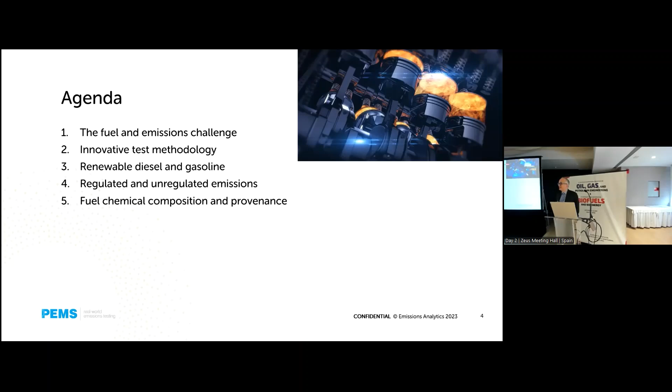Because without wanting to give away the punchline, there are a whole bunch of fuels out there with great sounding eco credentials, but there's also a lot of fraud out there too. And what we don't want to happen is some really promising markets for biofuels to be scuppered because of abuse, arbitrage between the elevated price of alternative fuels and standard fuels. And so that's something we need to be really alert to. And it's not a theoretical problem, as the data will show, it's an actual problem already today.

So what is the environmental issue that we're trying to address? Essentially, renewable fuels exist primarily to reduce the life cycle carbon dioxide emissions. They do have other ancillary benefits as well, but the primary reason we're pursuing it is for greenhouse gas emissions reduction. And so the key question is, how much do they reduce CO2, not in theory, but in practice? The planet doesn't care about theory, it just cares about what actually is emitted. And too many people lose sight of that important distinction.

So the question is, not only does an individual fuel reduce CO2, but can it in aggregate at the system level be a material contributor to decarbonisation? There are lots of things that can do a little bit, but actually if they can't scale to take a big chunk out of the overall problem, then maybe we shouldn't bother too much. But in switching to these fuels, we need to be careful we don't reduce climate change, but reintroduce problems of air quality because it makes tailpipe emissions worse.

So we need to balance those two things and relate them also to the legal values. Because on some emissions, like carbon monoxide emissions, tailpipes now are incredibly well controlled. So we can actually afford a small increase in carbon monoxide and still be massively below the legal limit. So we do need a pragmatism as well.

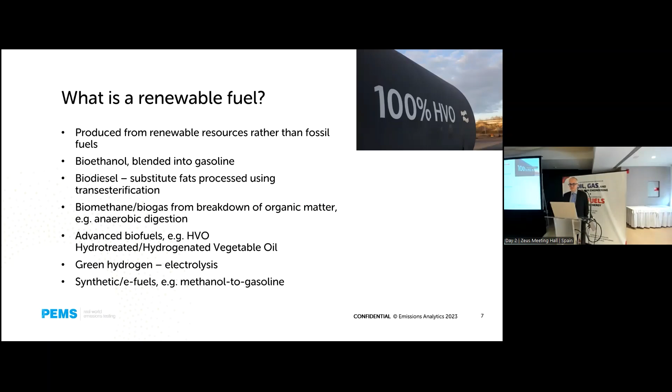The problem with them is the bio components. That all sounds great and lovely, but it changes the combustion characteristics. Could be in a good way, could be in a bad way. What we do know is in most cases the biofuel is lower energy density. So you've got immediately a difference in the efficiency of combustion. So you're burning more volumetrically of the liquid to get the same energy out. And so the bias, if anything, will be towards increased pollutant emissions.

But there are many other substances that are in the fuel, and it leads to an alternative mix of tailpipe pollutants. And you only really know when you try. But that's before you even talk about the upstream part of this, and we need to be really careful that the bio components as sold are really and truly as green as they make out to be, and where they come from, what methods, how far they've been transported even. And verification of that embedded carbon content is difficult.

The other part of the fuel challenge, and not to be neglected, is the scalability and the economics. Because this is really only much help to us if we can do this relatively cheaply and at huge scale. And that's the problem with HVO. There's not enough used cooking oil around to really scale HVO in the way it's currently conceived. Unlike synthetic fuel, which theoretically can be produced at unlimited scale.

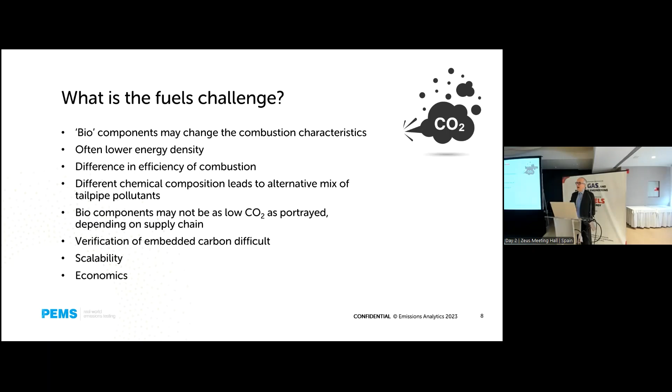And it comes back to our old friend that we were talking about yesterday, the electricity prices, or the low carbon electricity prices, and can we effectively scale that energy backbone of the world? Okay, so we test all these different bits that I talked about, from tailpipe to the fuel itself to the cabin and the tires, and that's the method that we apply.

So think about what we're going to do here. We're going to take a vehicle, we're going to look at the fuel, we're going to chemically analyze what goes into the tank, we're going to burn it, and then we're going to see what comes out of the tailpipe. And I'm going to just take you through a few results of what we've run.

So the backbone of our tailpipe testing is this blue box here, which is called a portable emissions measurement system. It measures CO2, CO, NOx, particles, a whole range of things. It can also do ammonia, at 1 hertz, so real-time mass emission, so actual milligrams per second of the pollutant coming out. You can measure, obviously, the distance traveled by the vehicle, so you can derive mass emissions per kilometer driven. And that's the crucial thing. So it's not just concentrations, it's actually the mass emissions. And this is used in vehicle regulation now in Europe.

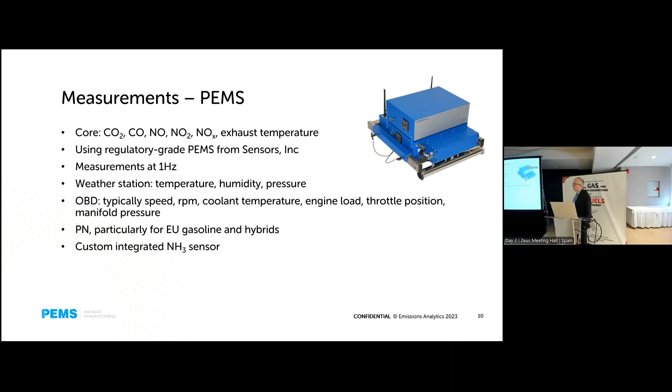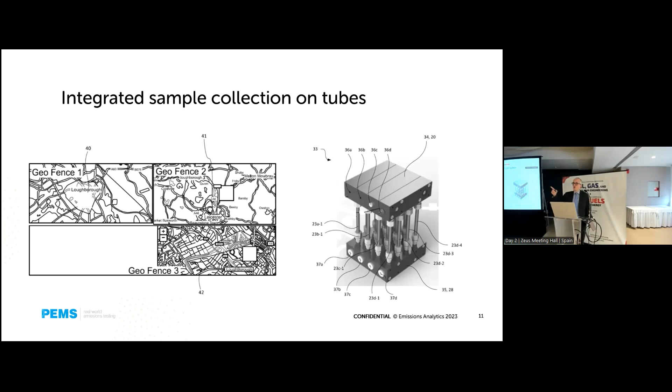So it's equipment of really good standing, but to which we've added an extra piece that we developed ourselves, which enables sampling of the raw exhaust onto various thermal desorption and other tubes, and geofence, so we can put the urban part of the driving on some of the tubes, the motorway bit on another part of the tubes, the cold start bit. And then that enables us at the end of the test to do some very detailed chemical analysis, almost a full VOC speciation, as well as N2O and various other things from that tailpipe.

So you've got the regulated emissions using the blue box, and you've got the unregulated emissions using our matrix of tubes and into this 2-dimensional gas chromatography and time of flight mass spectrometry. So a pretty advanced piece of kit, which allows you to take a sample of exhaust gas and really pretty much fully separate, identify, and quantify, again, in mass emissions terms, what was in that tailpipe.

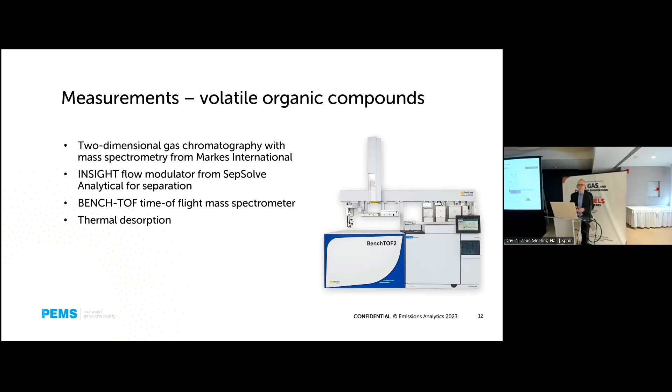So you can see why this is relevant for testing biofuels, that we can see, are we still compliant on the regulated pollutants, but are we introducing any nasty VOCs accidentally? Or are there some additional benefits that we didn't previously know about? The one tricky one that doesn't work using the tubes is formaldehyde, because it's so volatile, but our matrix of tubes does allow for DNPH cartridges, so we can derivatize the formaldehyde and actually measure that as well.

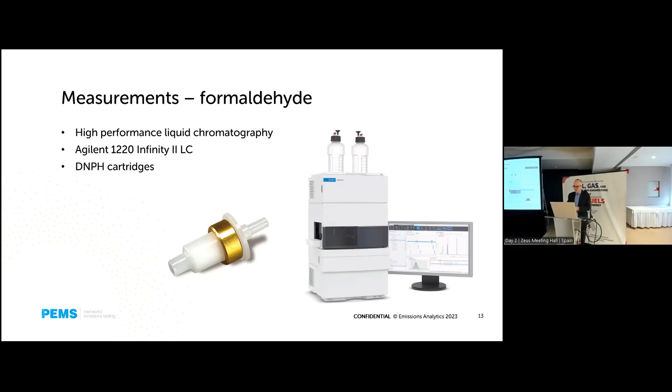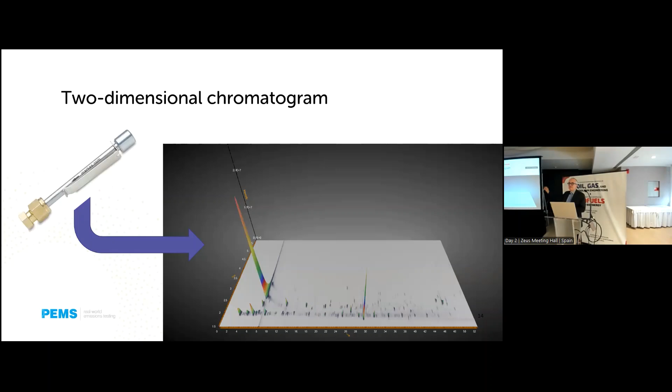Out of the tubes, you then get a lovely 2-dimensional chromatogram with time. The time on the 2 columns is the separator, and this is a real chromatogram. And so you can see from a sample, we can identify hundreds of compounds individually and quantify them. That becomes a bit baffling to get your head round. So we then stick it all back together into various functional groups.

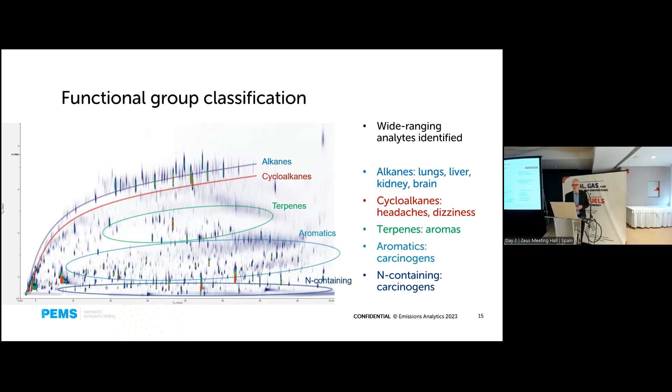Many of you, I'm sure, will be familiar with this. The ones we immediately think about are the aromatics, particularly the polycyclic aromatic hydrocarbons and the nitro aromatics as well, where a lot of the carcinogens lie. But the groups do have their own sort of broad generic effects. Right. So that's how we do it.

So you can imagine a vehicle here instrumented with all this stuff. We can actually then drive it on the real road. So this is not a lab. This is in reality. And so these are real tests we've run. So the first thing was to do a simple test, a tug on the River Thames in London, and the operator there wanted to know, will this be much better for the environment if we switch from running standard diesel to HVO?

What happened? So we got some HVO. The tugboat was pulling 500 tons of payload. This was actually interesting. London was, I think, the first city in the world to do big public sewers, but we did them a long time ago, and they're now too small to cope with the 8 million population of London. So over the last 10 years, London has been building a super sewer along the Thames, which has just opened. It's been fantastic, actually.

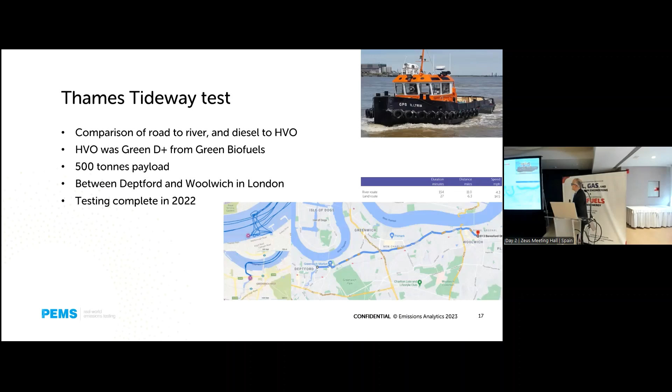And this was about removing all the spoil dug out from this tunnel, because there was a huge amount of stuff. So they wanted to do it in the most environmentally friendly way possible. So as you can see, we went up and down the Thames, moving this spoil. And the ultimate acid test was, is it better to put it on tugboats out on the river, or to put it on lots and lots of different trucks? So that was why we were doing this, and we wanted to choose the fuel that did it in the most environmentally friendly way possible.

So here we've got the result. You see the B7 diesel, that's the standard diesel, the HVO, you've got fuel consumption, but then CO2, all the key regulated emissions. And what we can see here is that essentially it was fantastic. HVO was fantastic for NOx reduction, over a 50% reduction in NOx. And given that's one of the problematic air pollutants in London, that's great.

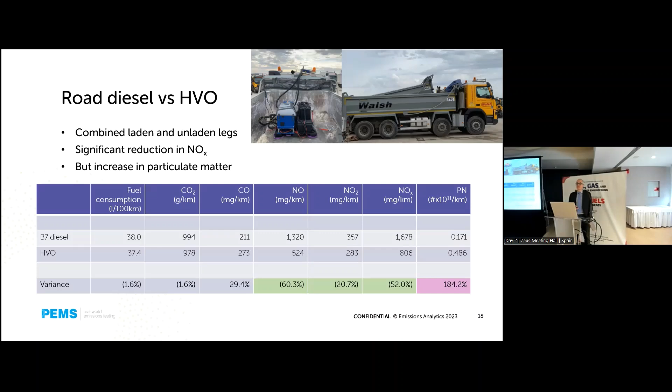But the particle number, which is also a tailpipe regulated value, you can see almost trebled. So it was still actually at quite low levels. So it did treble, but it was still not too problematic. So overall, the view was that HVO was a net contributor on balance to emissions reduction. So that's the sort of simple first case of what we can do.

Now let's look at it in a little bit more detail and look at what happens with some alternative gasoline. So the first thing is I wanted to show how we can use our chemical approach to understanding the different chemical composition. So here we've taken a very simple comparison, just to illustrate what we can do. We've taken a standard diesel and compared it to a premium diesel. Very simple. You can buy these Shell products at the pump today. And this is the power of the 2DGC. Here, we've taken the top compounds that we've identified and ranked them by their concentration in the sample.

The blue line is the standard diesel, and the V-Power premium diesel is the orange line. You can see there's a lot of similarity, but you can immediately identify certain compounds there which are characteristic of the additives they put in and the slightly different feedstocks that Shell uses in putting together the V-Power.

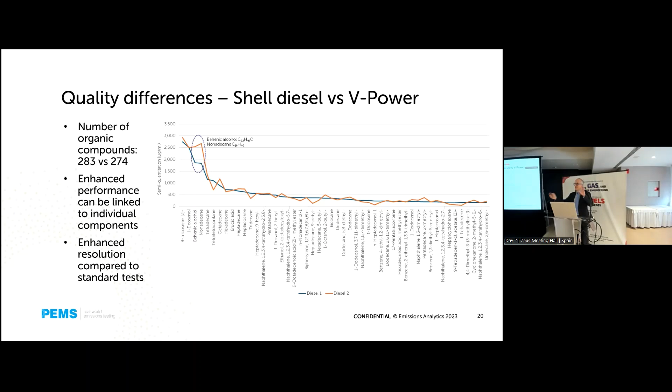So this is the part where we understand what goes in, and then we put it together with what comes out, and we can start seeing statistically the patterns between if you change the fuel, what can happen to the exhaust. We also did the same.

I put this in because we're interested in tires at the moment. People are trying to use pyrolysis of end-of-life tires to create a diesel substitute as well, which is quite an energy-intensive process, so it's not easy to make work. Also, to get the required quality, you see here the green is overlaid on the previous result. Green is the TPO. TPO-based diesel is chemically extremely different from standard diesel, and therefore we would expect it to have really big impacts on the tailpipe emissions. So there's a big debate as to whether that would still be compliant at the tailpipe.

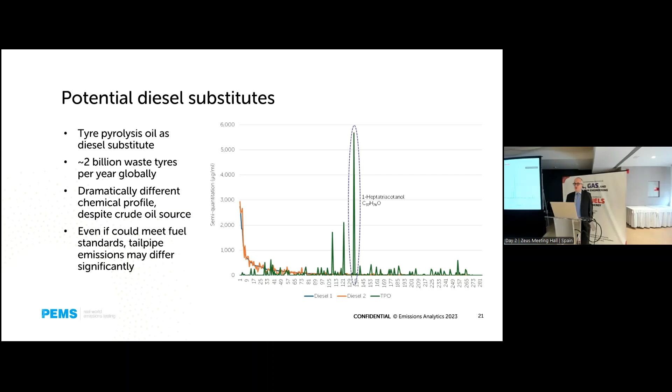Sorry, I slightly preempted myself. We haven't quite got to the gasoline results yet, because I wanted to say one more thing about the diesel side, which is on the HVO. We've looked at the chemical composition and the tailpipe emissions, but what about the provenance side of it? HVO is meant to be lower CO2 because it substitutes fossil for these waste products. But we can use the 2DGC to look at this provenance question.

So we bought 4 different HVOs from the market, legally sold in the European market, all badged HVO, so all notionally the same: HVO 1, 2, 3, 4. We did the 2DGC chemical speciation and compared it to B7 diesel. The null hypothesis is that HVO 1 to 4 are the same. You would have thought there's an ISO standard. It's all regulated. It's all sold by legal companies.

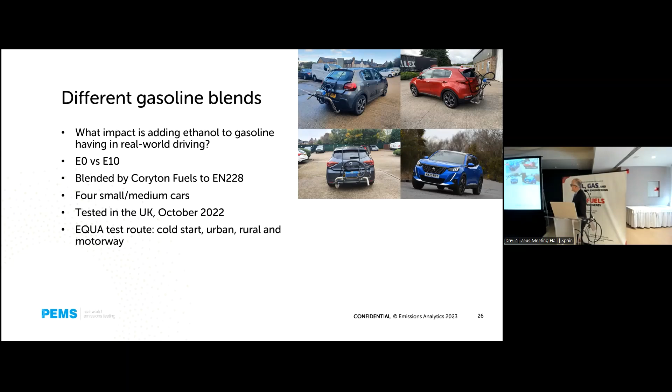So we took four cars that we tested in the UK on our on-road Equa test route, taking in cold start, urban, rural, and motorway, and we looked for regulated and unregulated pollutants. Regulated first: there was a highly consistent result between the vehicles. By switching from E0, no ethanol at all, to E10, there was on average a 31% reduction in carbon monoxide, already from low levels, so very good. But there was a 21% increase in NOx. Fortunately, because it's gasoline, that was a 21% increase from almost nothing to start with.

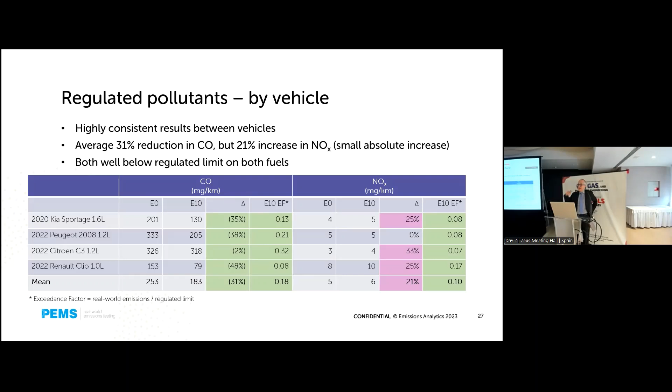So yes, an increase, but the interpretation should be not a problem. Certainly not a significant contributor to air quality. So all well below the regulated limits there. I should say, by the way, E10, you probably know, E10 as sold means not 10% ethanol, but up to 10% ethanol. For the purposes of this test, we got specially blended E10, which was actually 10%. So this wasn't just random.

Unregulated: so we've also had a full speciation of the unregulated, but I'm only going to draw attention to a number of them today. So formaldehyde, other aldehydes, toluene, and nitrous oxide, because they have particular human health effects and other environmental effects. So these are sort of bellwether compounds, if you like. And so these are the results, and I've itemized out here the 4 different cars that we tested. You can see it's a bit of a mixed picture.

On formaldehyde, the overall mean increase was 18%, and the Kia Sportage 1.6 had a particularly big increase in formaldehyde. Other aldehydes were down 20%, but again, a mean of quite a wide spread. Toluene was probably the worst there, with 3 of the 4 showing increases, and the average being a 90% increase. But on the other hand, nitrous oxide was about flat to down in 3 of the cases.

Nitrous oxide, by the way, is a problem primarily as a very potent greenhouse gas. It's about 260 times more potent a greenhouse gas than CO2, I think it is. So small amounts of that are bad.

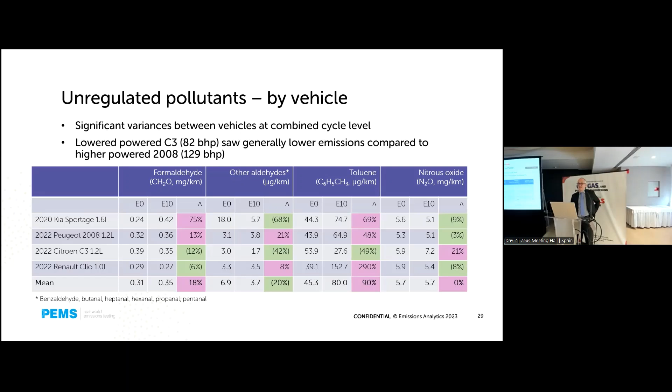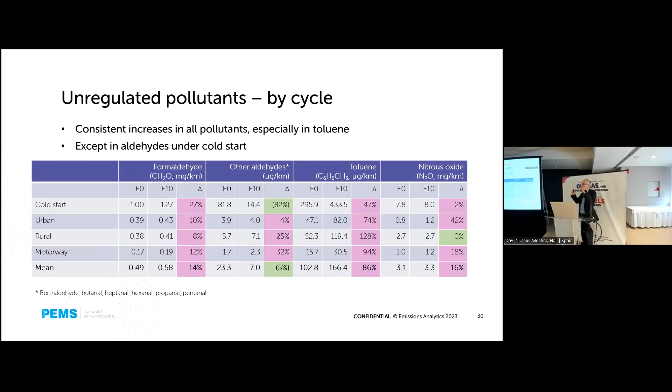And then we can also break down the same results, not by the cars, but by the different parts of the test cycle. So you can see in cold start, actually, the formaldehyde was up the most, but other aldehydes were actually down significantly. Toluene was up consistently, however fast you were driving the car. So that goes to show the power of this test method in terms of the granularity and the real-time data that you can get for both regulated and unregulated.

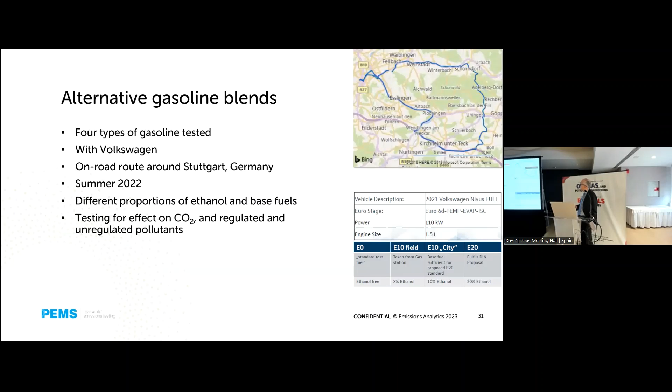We also did a similar test, pushing it a little bit further to E20. We did a test program with Volkswagen on roads around Stuttgart in Germany to see if you can push the proportion of ethanol up even further without having any significant problems. And you'll see here that we begin to see perhaps a limit of what can be done in terms of the proportionate blending. And I'm looking at our US colleagues who push the proportion of ethanol higher than we do currently.

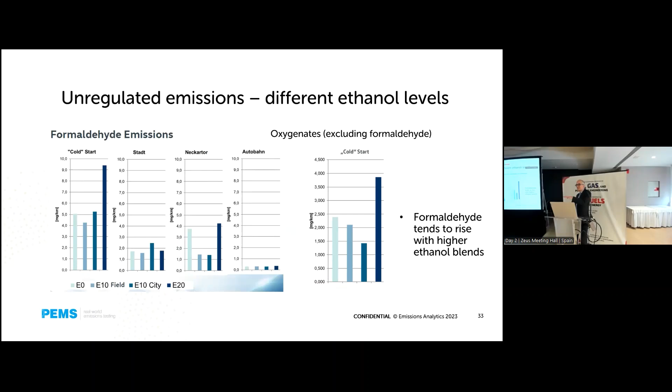So, in summary, we think that putting these two bits together, what goes in and what comes out, is actually really crucial in understanding the overall picture. And by putting together the PEMS equipment with the two-dimensional gas chromatography, you have a really powerful way of understanding what's happening. Don't think of me just as a vehicles guy, though, because we apply a lot of the same techniques to bioplastics, for example. Anything where you've got some sort of fossil fuel backbone and we're trying to find bio alternatives, that's the space that we work.

And so renewable fuels in this case can make some reductions in regulated pollutants. The devil is in the detail. For some, like the ethanol in gasoline, it may lead to increases in certain aldehydes and hydrocarbons. There is undoubtedly, from a supply pressure point of view, a genuine risk of fraud in the supply chain that we need to be very mindful of, but we can use these sort of fuel fingerprinting techniques to weed that out and try to preserve the CO2 benefits.

And ultimately, renewable fuels, it sounds great, and in many ways it is great, but it does need to be able to demonstrate with a high degree of certainty that those emissions benefits are genuine and true. And if that can be done, then I think there is a healthy future for the market.